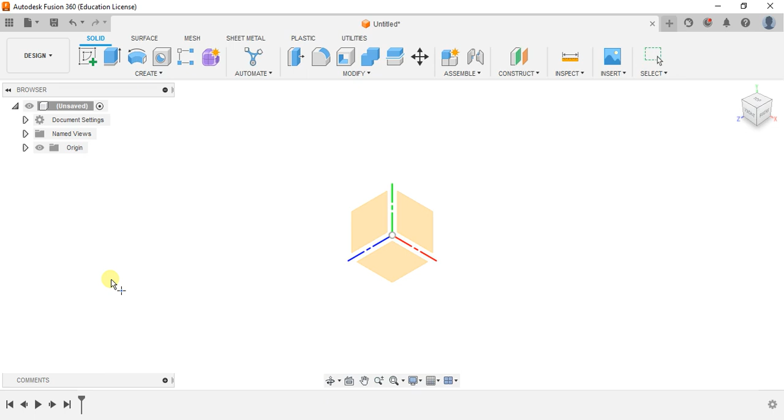First go to create and take a sphere. Just select any one of the planes and then the center point. Create a sphere of 110 mm diameter, and go to operation and change operation as new component.

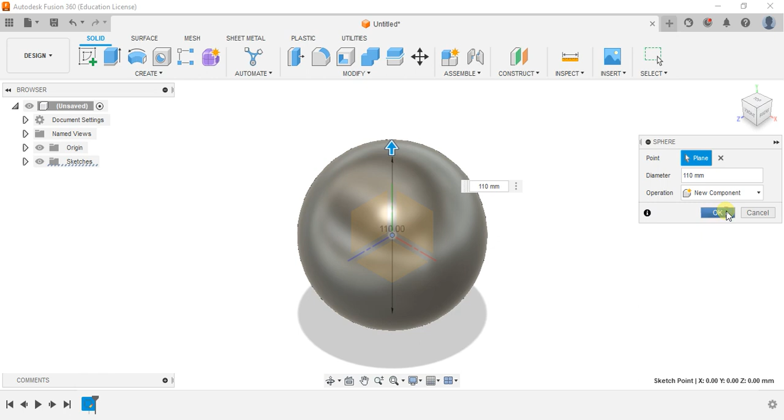Now create one more sphere, which is of dimension 100 mm. Operation new component.

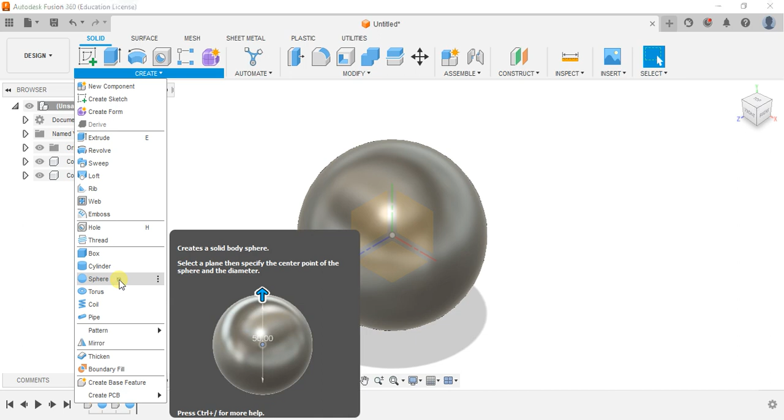One more sphere, 90 mm, new component.

Create sphere, 80 mm, new component.

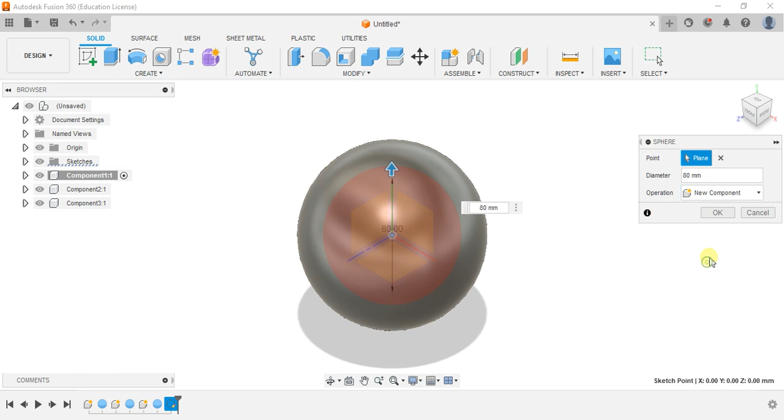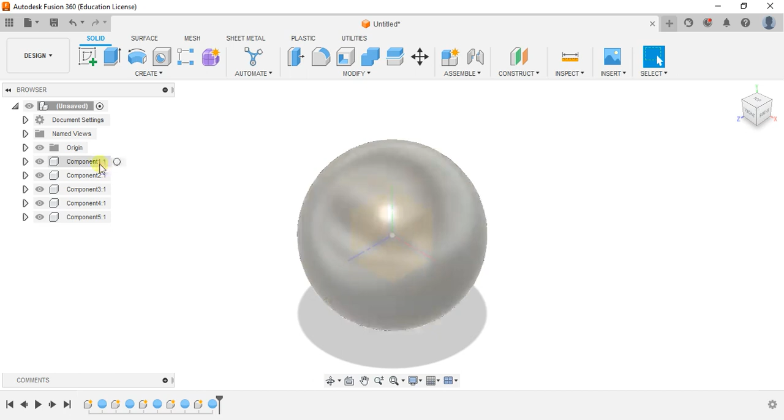Create sphere, and the last sphere is of 70 mm, and say new component. Okay, so once you are done with component 1, component 2, component 3, component 4, as well as component 5, which are of 110, 100, 90, 80 as well as 70 mm diameter.

Now select any one of the perpendicular planes. Let's say here I am taking the XZ plane and go to create sketch. After taking the create sketch, take a centered rectangle here.

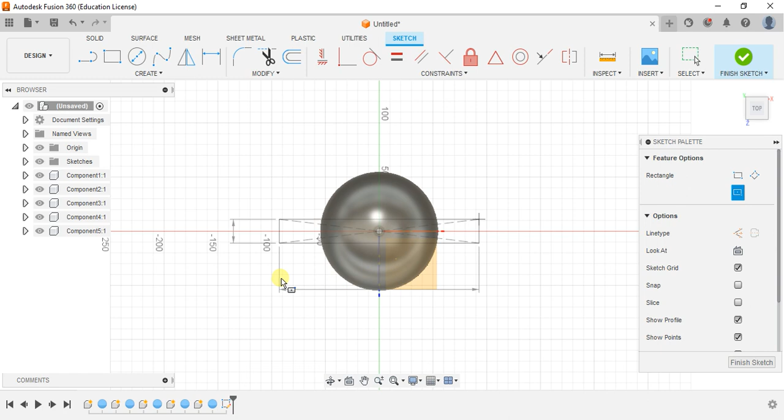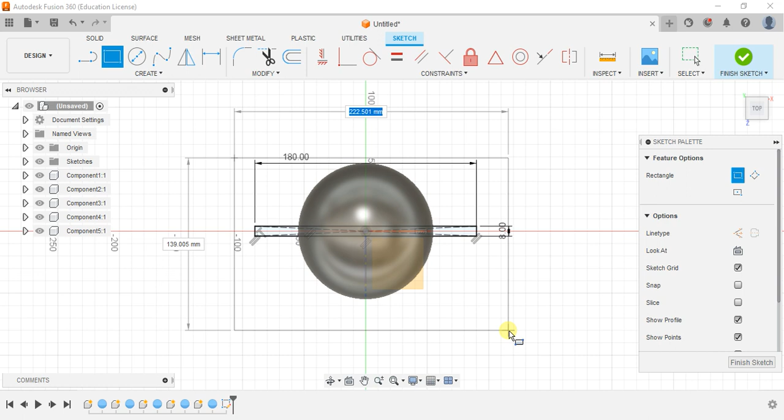Give this dimension such that it is somewhere around 180, and by this width you give as 8 mm. Now take one more rectangle, just cover the complete sphere as well as this rectangle, so I can cut out the portion of the spheres, something like this, and say finish sketch.

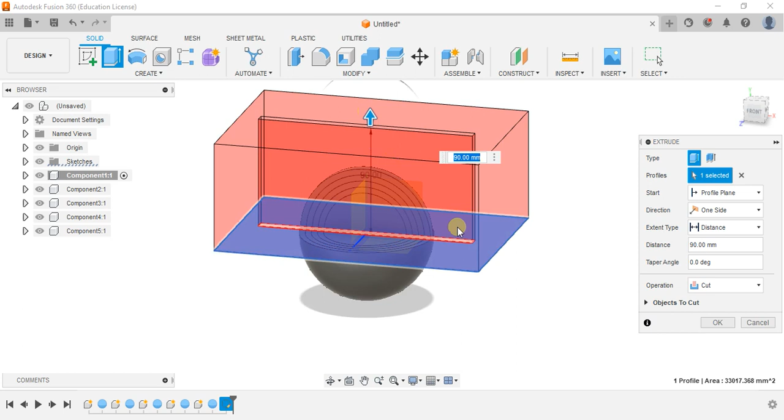Now use the extrude option and select the outer perimeter of this particular sphere, and give the direction, change it to symmetric cut. We will be left out with plates. You see here we are left out with these individual plates. Turn off the origin if you want. So here, see, we are left out with individual plates.

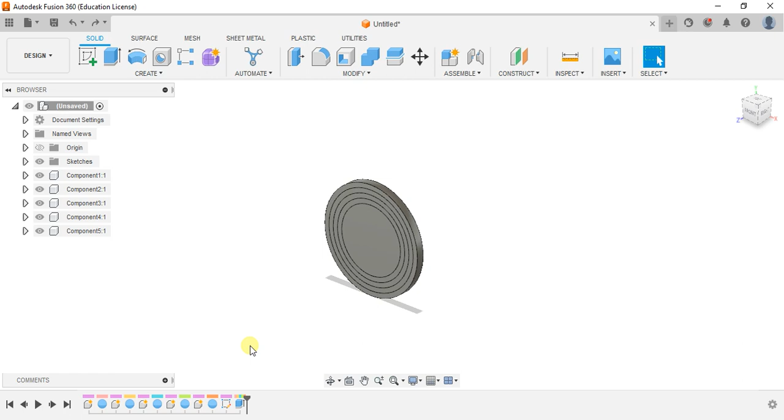After that, what we are going to do is apply the shell operation. So turn off all the components, and we will turn them on individually. For component toggle coloring, Shift N is a shortcut, Shift N for component toggle coloring. So turn off all the components.

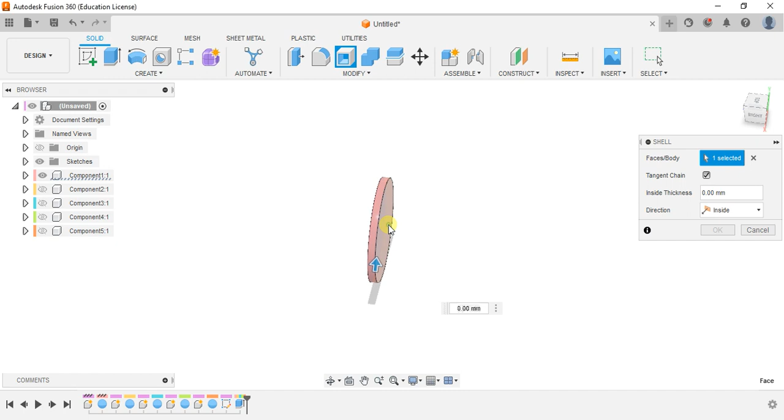So this is my first component, I am going to apply shell operation on this. To apply shell operation, go to modify, and under that we will find the shell option. Select either side and set thickness 2 mm. This is the first thing.

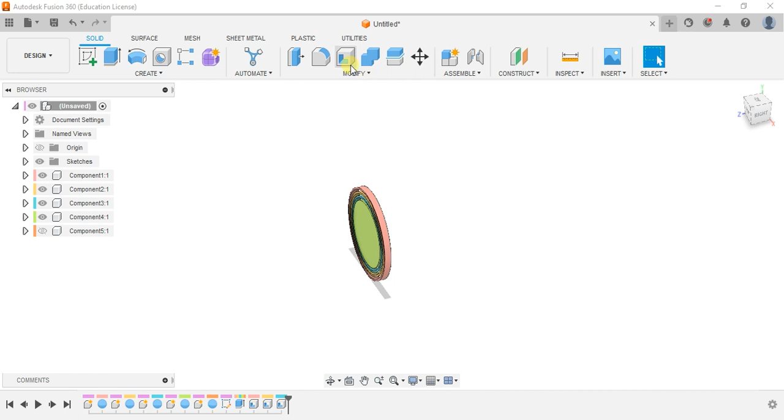Turn on the second component, apply shell, thickness 2 mm. Turn on the third component, apply shell. Turn on the fourth component and apply shell. Turn on the fifth component and apply shell here also.

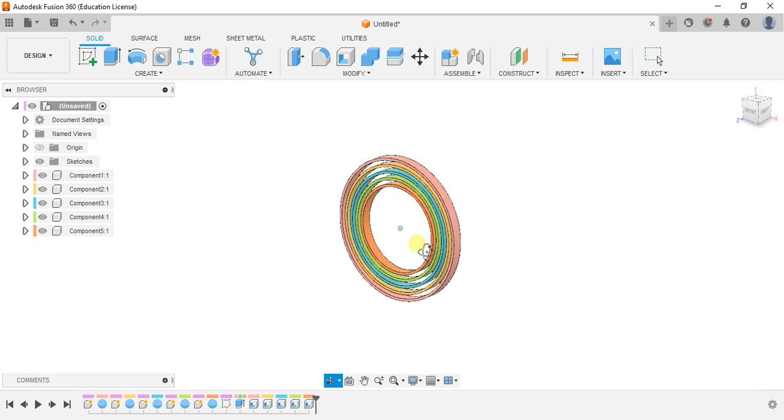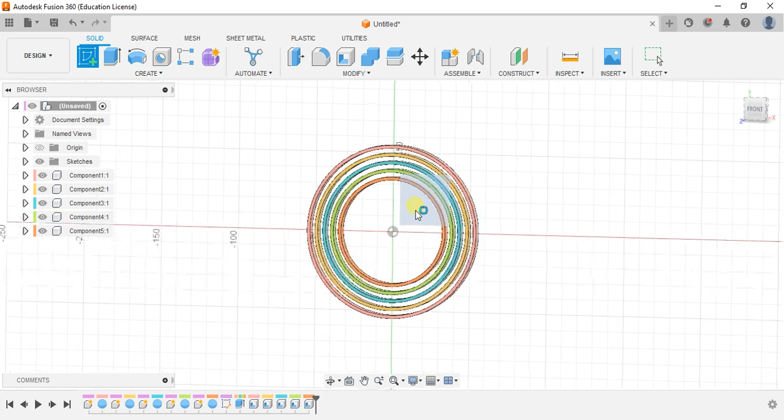So once you are done with making these rings, okay, now go to create sketch and select the XY plane. Now draw a random rectangle, just draw something like this and give dimension.

One end of the rectangle to the center point of origin, something like 10 mm, and say finish sketch. Now turn off all the components, example 2, 3, 4 as well as the fifth one, only retain the first component.

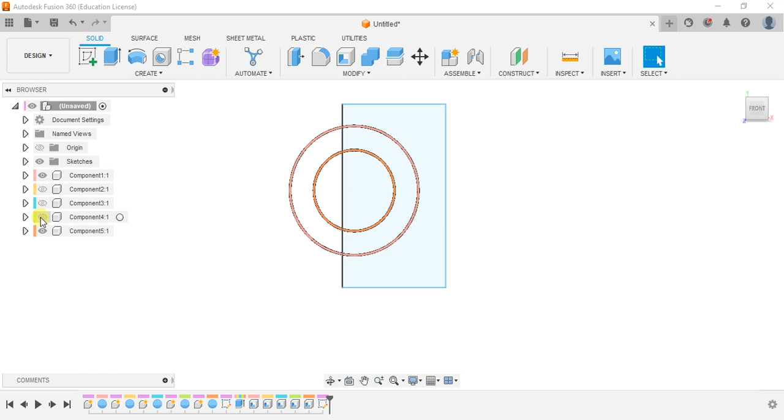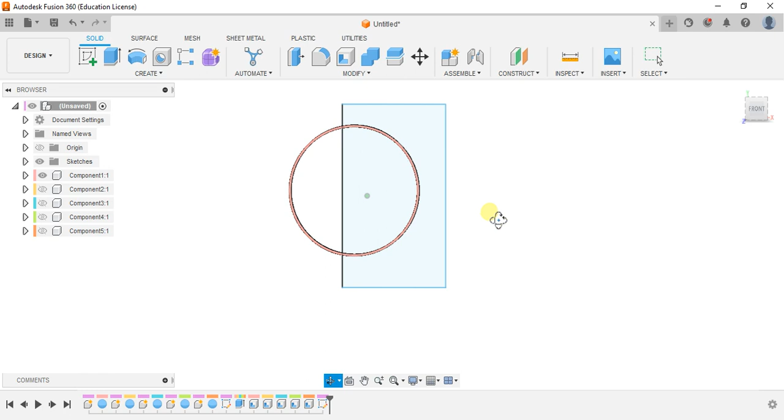Okay, now apply the extrude option here, and cut this portion. So change the direction to symmetric and say okay.

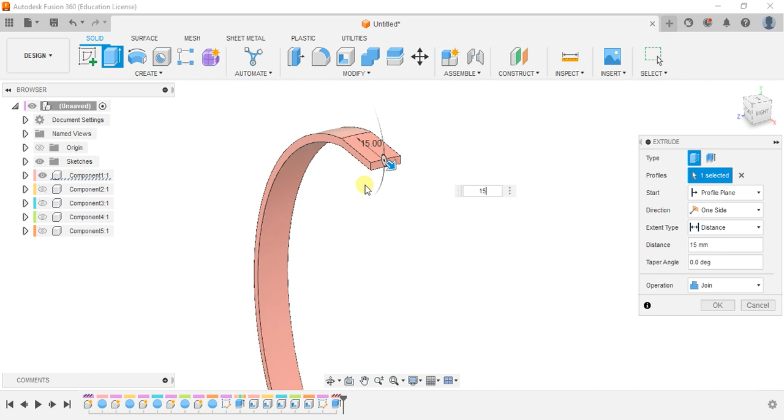Now what we have to do is we have the cross section of this rectangle. This rectangle cross section we have to extrude for 15 mm. So repeat the same procedure on the bottom side also, 15 mm. Now bring back all the components.

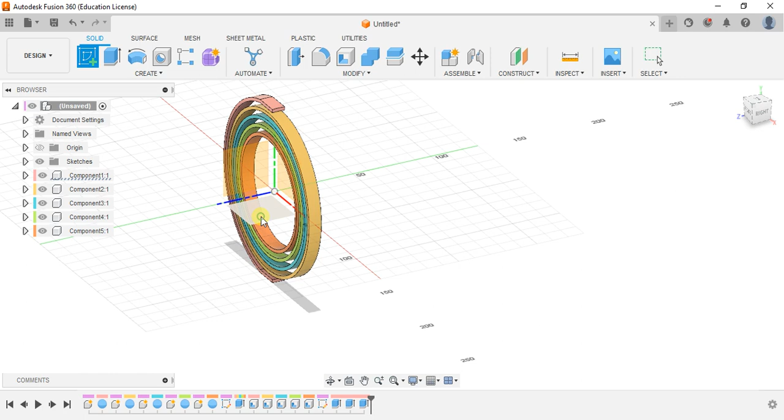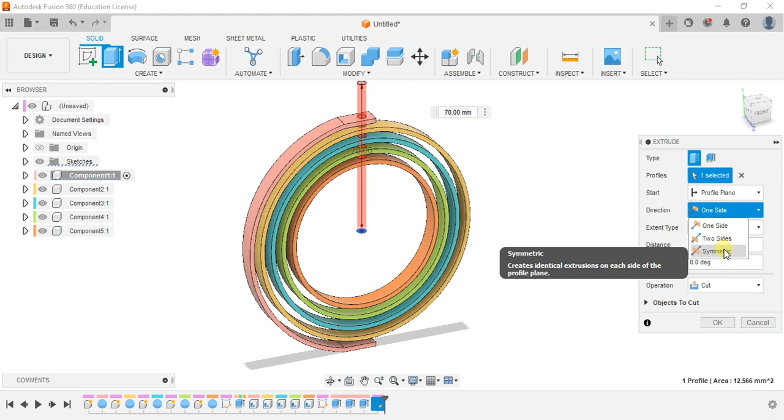Now create sketch on the XZ plane from the center point, draw a circle of diameter 4 mm, and create an extrude cut, changing the direction to symmetric. So okay, this is the first step.

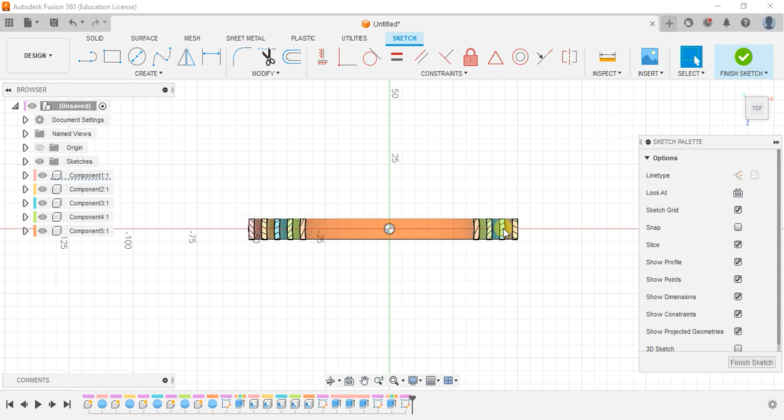Next, create sketch once again and select the XZ plane. Now in the sketch palette here we will find an option called slice. So turn on the slice. When we turn on the slice, it will display the cross section area. So using this cross section area we are going to make some fringes.

So to make the fringes, first I am taking a construction line for reference purposes. Then turn off the construction.

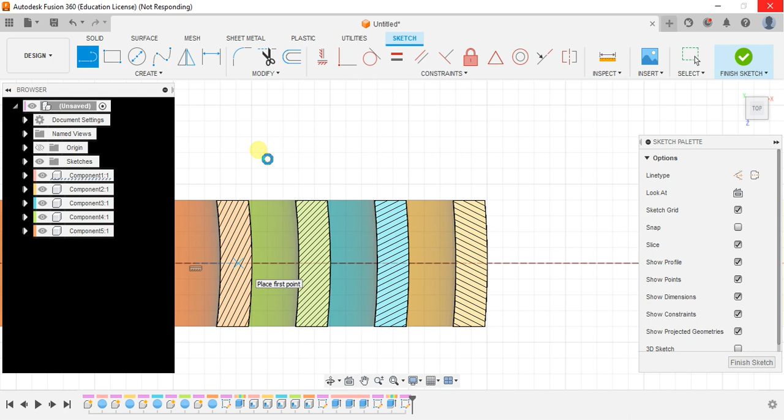So this fringe step is very important. The first fringe is made from the circle or sphere of 100 mm to the sphere of 90 mm. So take a line, first point till the next body, this is the first step. And the second line is from the center of sphere 90, which has to cross to sphere 80.

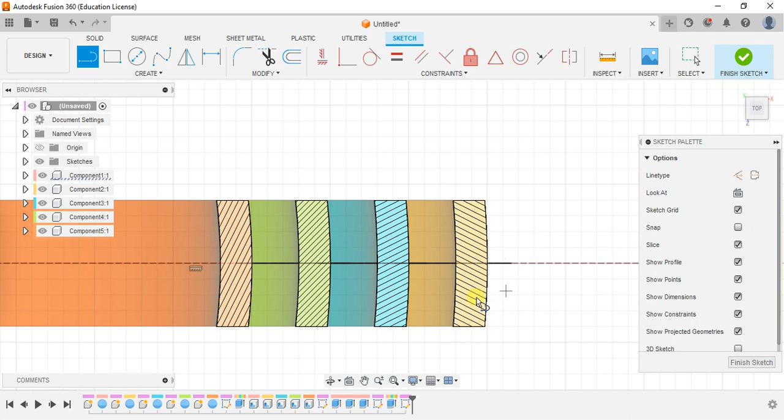And one more, and the last one is for diameter 71. So once you are done with all the sketches, say finish sketch.

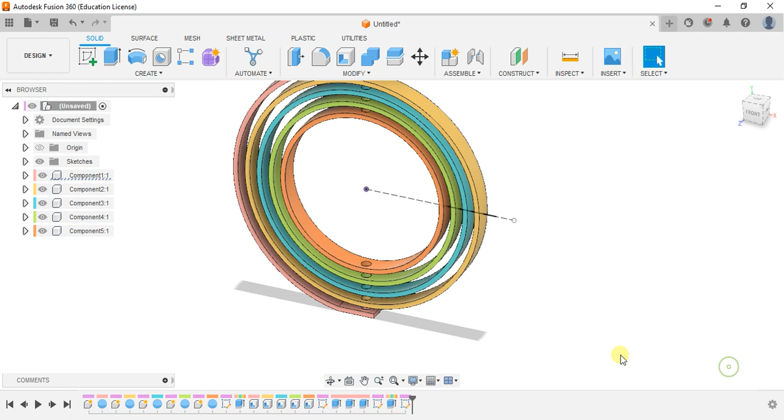Now we have to use an option called pipe. So before using the pipe option, turn off all the components and we will execute this pipe option one by one. So first let's bring back only the first component.

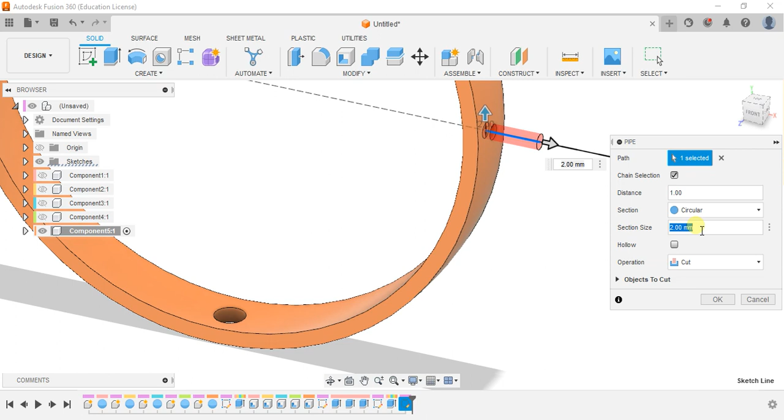Now go to create. Under create we'll find an option called pipe. Select the pipe option and give this surface over here which we have drawn for the first ring. Give the section size as 4 mm, and change the operation to join, say okay.